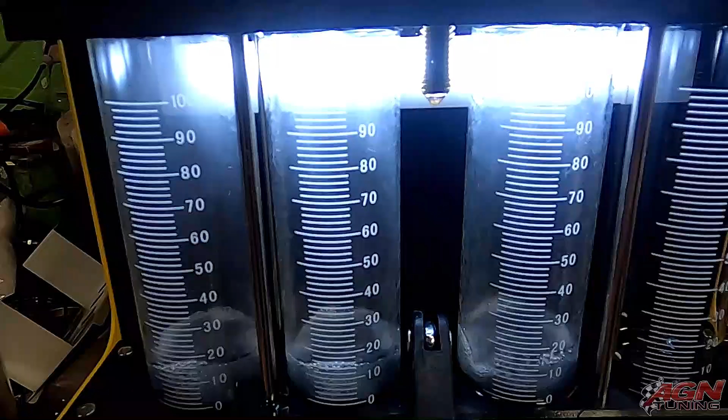Gives you the spray pattern, you can kind of see it. Alright, we're going to do that test one more time.

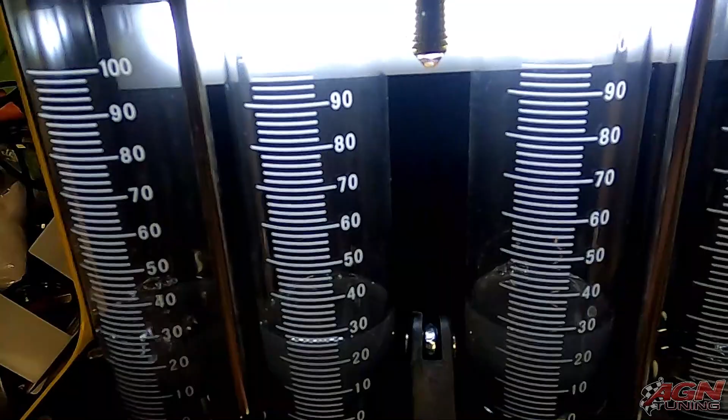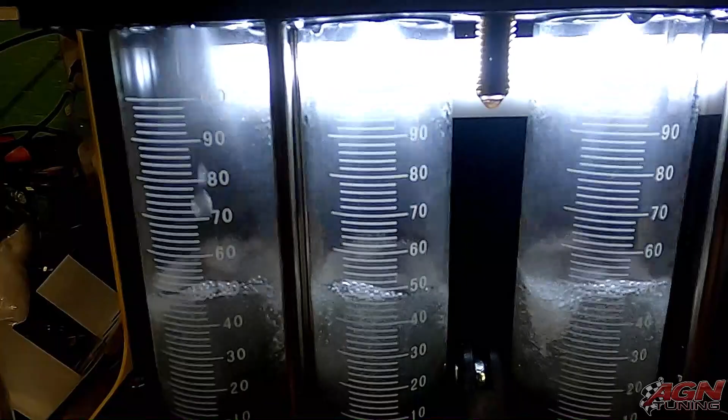Okay, so you can see we're sitting right about 50, roughly, all the way across.

Now we are going to do the same exact test at the same exact pressure after he decaps one of these injectors, and he'll show you how to do that.

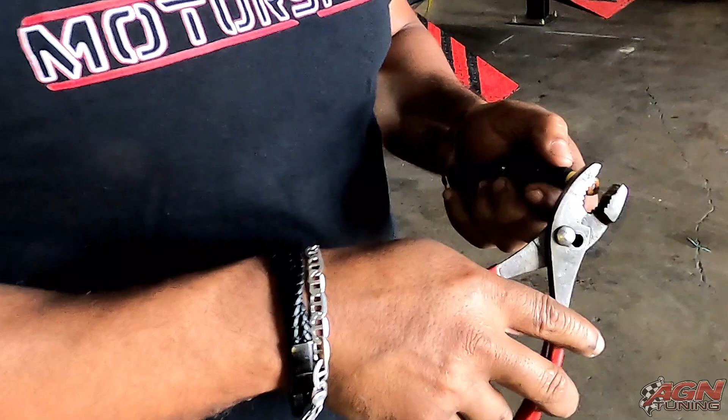So here we go. First thing you have to do is remove this cap right here. Sometimes it's a little bit of a pain in the butt, but I use some pliers. You're just removing the little plastic cap at the tip. I don't want something sharp so we don't hurt the injector, but I have to remove this cap.

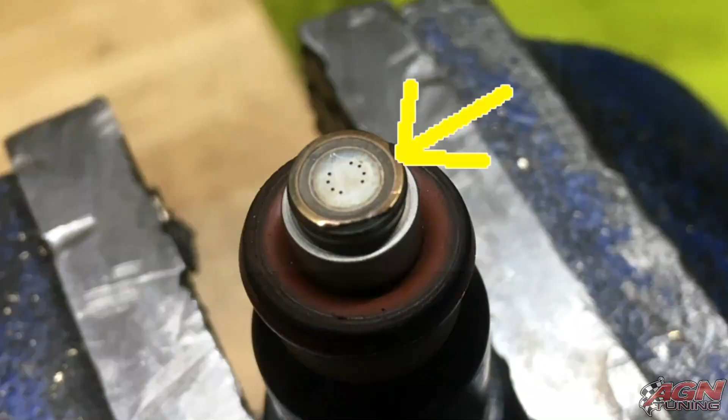There we go. Alright, so now what I'm going to do is remove this area right here, grind it a little bit. Everybody can use their own way, but I usually use my stone grinder and go little by little until this goes away. So there's like a little machine weld? Yeah.

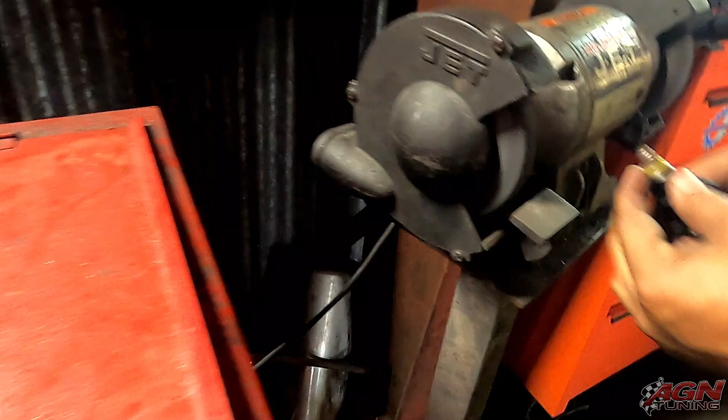It's something real easy, it's not hard, but you have to be careful.

You hear the different sound, the noise they make when you're getting real fine, you can hear it, it sounds different. Almost there. Right there, you see how they look? Yep, and then you bring a little bit of the border, the sharp edge.

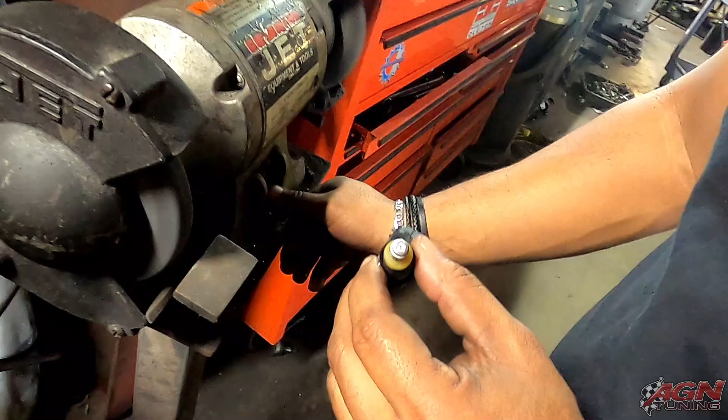It's good, alright, that's how we decap the injectors. Pretty simple little process. What's the benefit of doing that? I mean, they make the injector a little bit bigger, so the little thing you have on top is good for atomization, but the injector is still fine the way it is right now, it just flows more.

Alright, so now we can take this back to my tester and test it out. That's exactly what we're going to do. We've got the injector right here that he just decapped. These two outside ones are decapped, these are the stock ones, not decapped. They're all 270cc injectors out of my Acura TL. I'm going to go ahead and start the test, shut this valve right here, and go ahead and hit play.

If you can see the spray pattern difference, we're going to go ahead and hit play again.

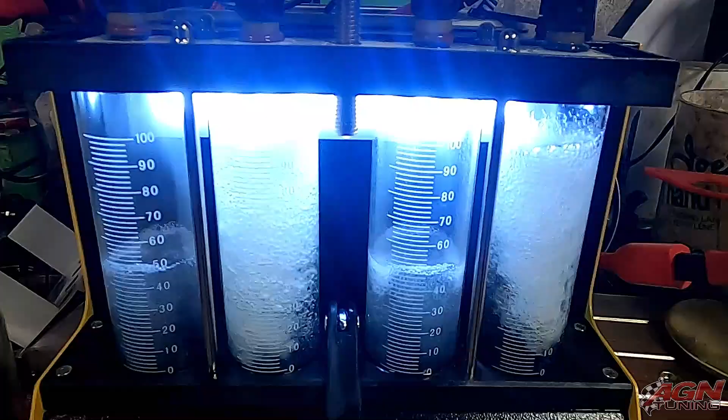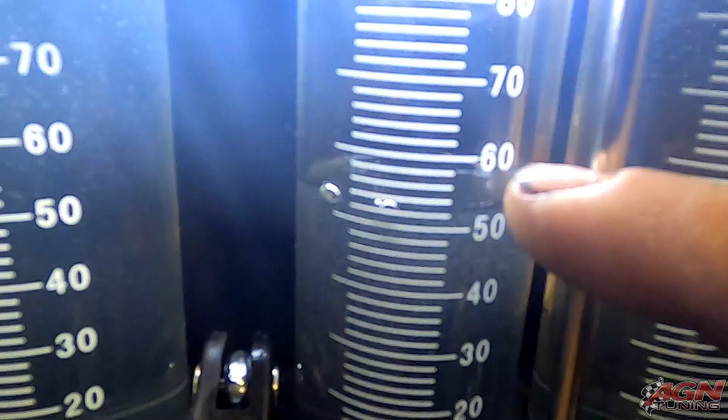You can definitely see the difference. These two outside ones are decapped stock injectors, and this one is the stock injector with no decap. We're at 52, 54, and this one's around 52, 54 as well. This one here is pretty much right at 90, and this one here is just a hair over 90. But you can definitely see the difference the decap makes, way more fuel off the same injector.

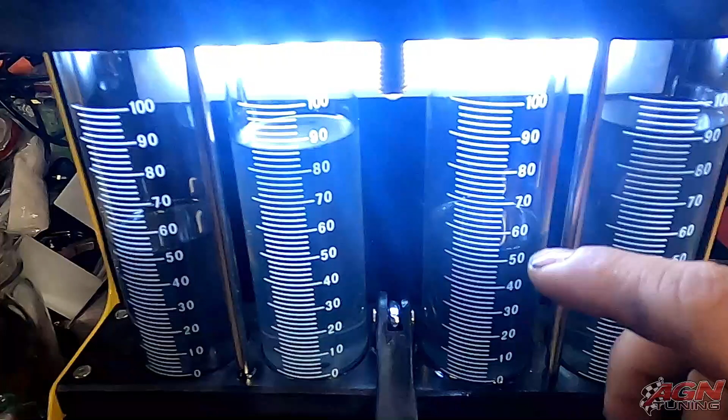This method works for a lot of injectors, but not all injectors can be decapped. Right now you can see the difference between decapped injectors versus stock, it's a pretty big difference. It's something real cheap, you don't have to spend money and buy new injectors. It's good for like a stock RSX, stock SI, if you want to go E85, that's actually the best way to go.

And just so that we're clear, this is not your injector cleaning machine. No, that's not mine, we're just doing a test right now. I just wanted people to know that he doesn't clean injectors. No, this is my personal one that I use for my vehicles, so just wanted to make that clear.

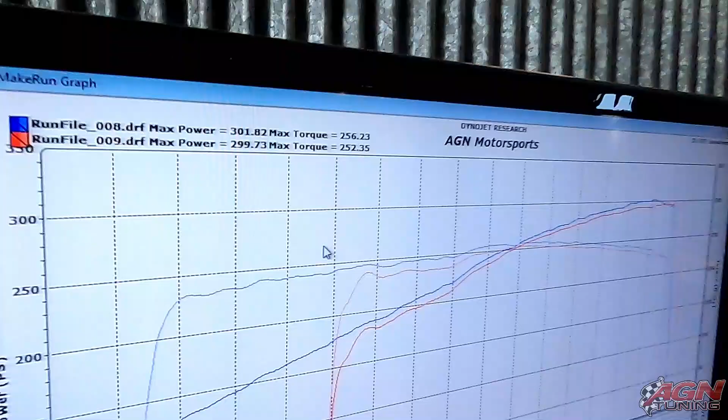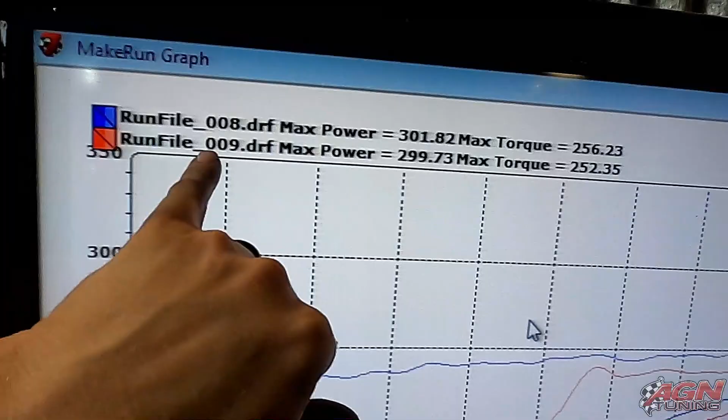For today, which is run 009, it's at 299, so we're pretty close to what we were last time we came in, which is good. He can definitely make adjustments from here.

He just said that it's running really rich and it still made 299, which is pretty good, so you can lean it out a little bit to make more power. Right now when he floors it, it's basically straight 10.0, which is really rich, because of the much larger injectors. But he's basically just going to adjust everything, and we'll go again and see what the data says.

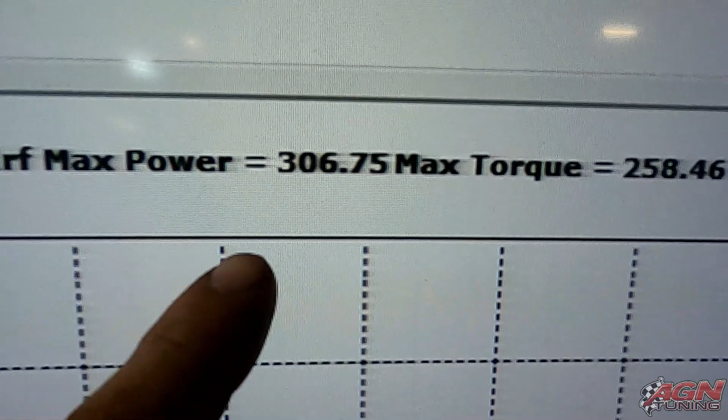Made 306 horses with 258 torque. That is on the 93. That's what we're safely calling it quits at on 93.

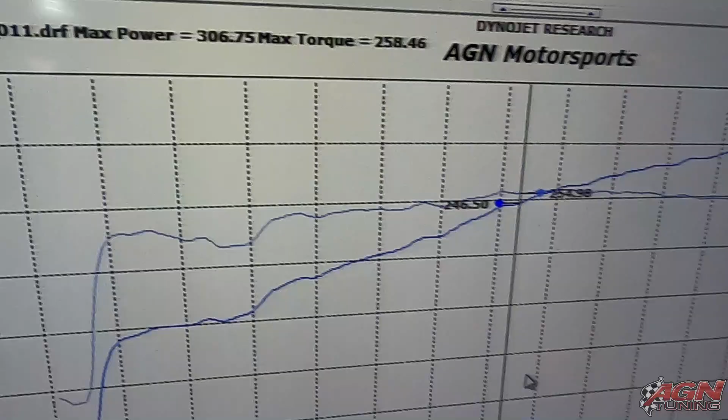So now we're going to go ahead and mix up the VP fuel, an additive. This stuff works really well for boosting octane rating. We've got about a half gallon in here. I'm going to pour this whole thing into it, shake this up well, and pour this in the car. So I'm going to go ahead and do that.

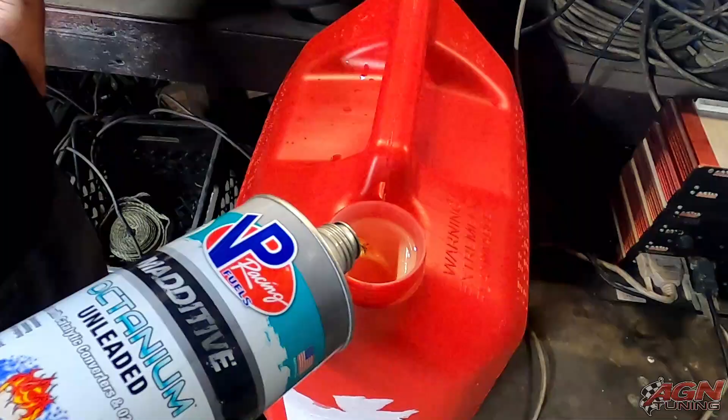Go ahead and let it run on the dyno just so that it can circulate all of that fuel that we just put in. It takes a little bit, like a couple minutes, but once that's done, we'll go ahead and see what it makes with the 93 octane with VP.

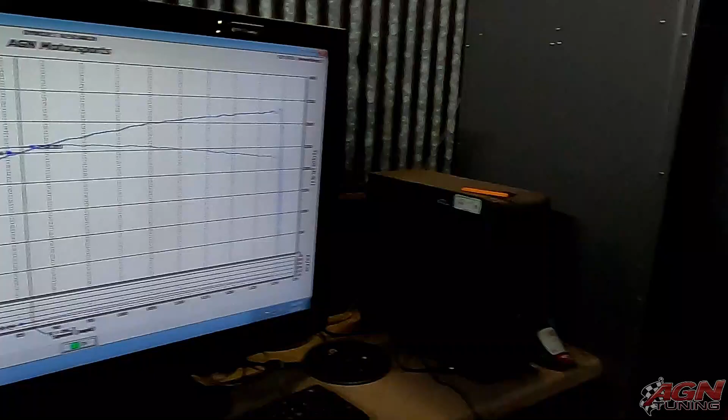Definitely made a huge difference. That's at 331. That's pretty good for having pre-cat still.

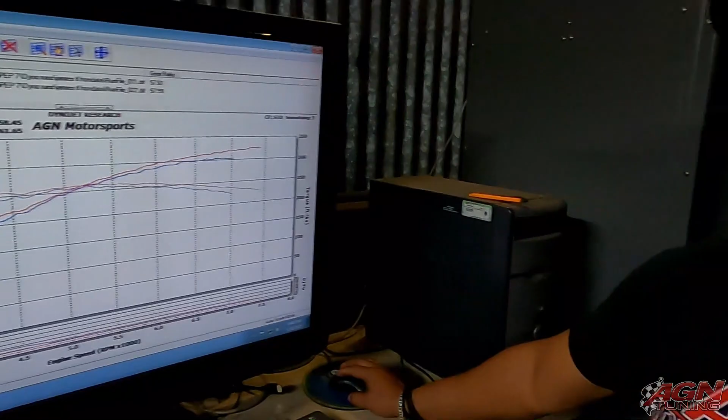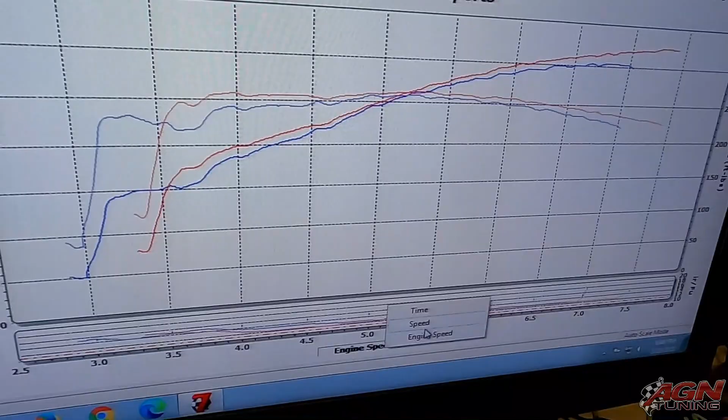Okay, so what are we looking at? Right now 302 horsepower with no VP additive, and 324 is with the VP. If we go by speed, it will be a little bit higher numbers. Speed is 306 on non-VP additive and 331 on VP.

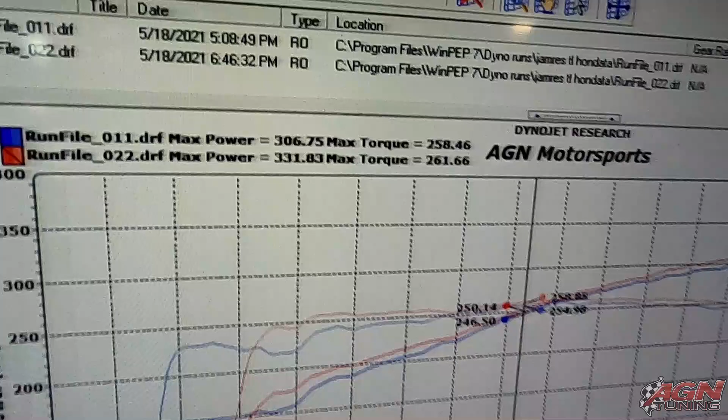So the VP definitely, yeah, definitely works, and we were definitely getting results. 0 knock, 0 knock, and this is perfect. It's not the first time I tried the VP, we had good results, really good stuff. We're not sponsored by VP or anything, just something we buy on O'Reilly's right there next door. We bought it, we put it in the cars, and it works. It's really good stuff.

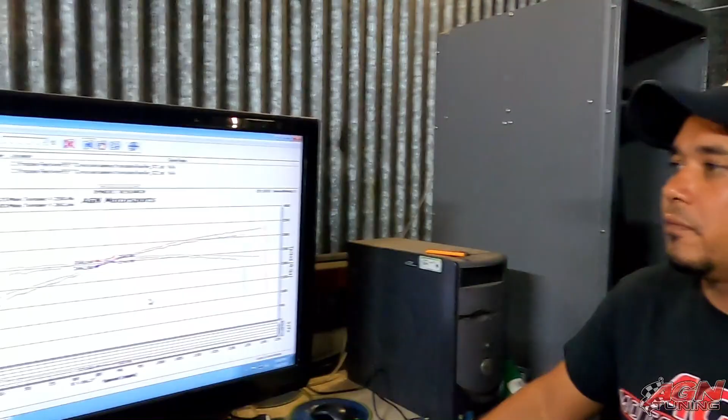He was able to increase the timing safely. So I will only use this tune when I have the VP on it. No, we use it without VP too, and that right there will be my just normal 93, daily normal drive 93 tune.

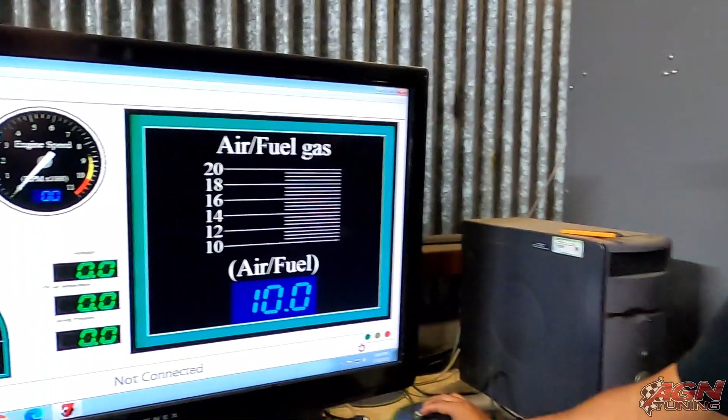Today we have to take into consideration it's a lot of humidity today. So it could have made more. Yeah, the humidity hurts horsepower. Right now it's 29, usually we tune around 10 when it's dry in the summer, you know what I mean. So right now it's a lot of humidity, but it's the numbers, you know.

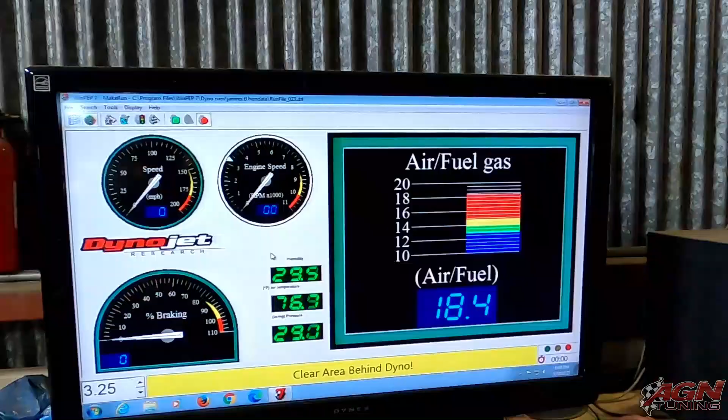Yeah, it definitely runs good, and it sounded super healthy. So if you guys are in the Killeen area or Central Texas area, come over here. AGN Tuning, he does really good work and makes it safe. He could have squeezed more power out, but like we said, we want to keep it on the safe side. This is my daily driver, you know, AC, power steering, all the whole 9 yards. So we just want to keep it safe and make some power, and definitely accomplish that goal.